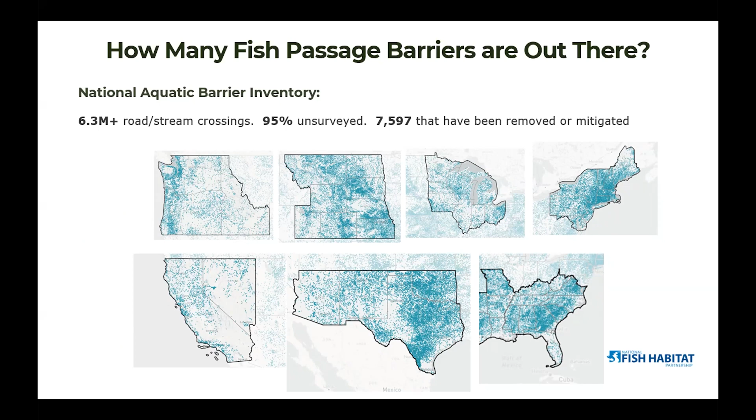So this is a pretty savvy group. Don't have to tell you guys what the problems are with these culverts, but just in general, high water velocity, shallow depth, steep gradient, and plunge height and distance. So my background's primarily salmonids, but as I've got out in the world, I've learned this term AOP, Aquatic Organism Passage. So hellbenders in the southeast, darters, eels. I learned about the bog turtle recently, our smallest turtle in North America.

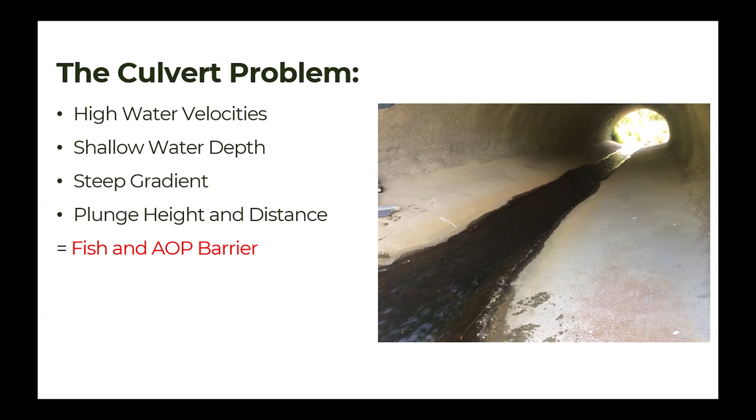So removal and replacement is the best option. I mean, I would never argue against that. There's a project, Interstate 5 is a main north-south in Western Washington. There's a 3 culvert replacement project under Interstate 5. It's going to cost $136 million for one fish passage project. And people are kind of shaking their head that that's a lot of money for these projects. Are there other things we can do? Those are to be done, it's part of a settlement, but it's just such a massive problem. All of our aquatic creatures are suffering from 1,000 cuts.

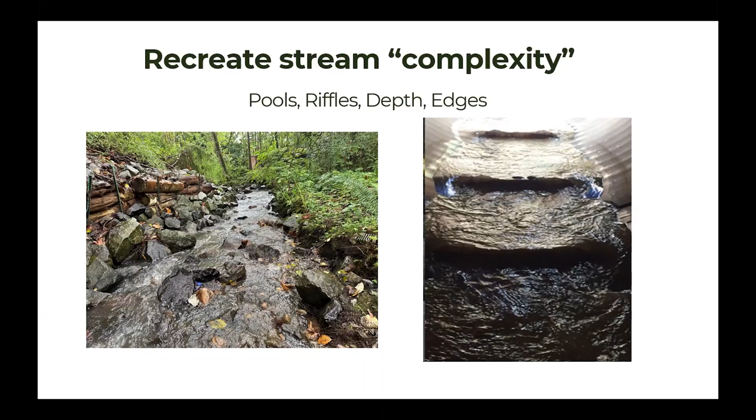So baffles and weirs, I've studied fish passage for 30 years. This is the things we've done: CFD analysis, physical models, on-site, 1-to-1 scale fish ladder evaluations. So this is not strange to me. So I ChatGPT'd it, some of the first weirs were used for fish passage back in the 1830s in Scotland. So there's tons of information on using weirs and baffles for fish passage. I could go into the science later, but let's assume for the moment they're useful at times. Well, they definitely fell out of favor in culverts because, as you can see here, they reduce the size of your culvert or conveyance.

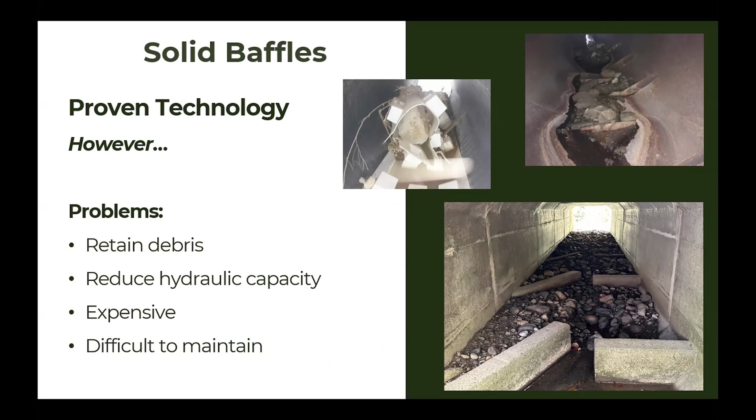They catch a lot of debris. They cause a lot of problems. They break. It's a maintenance issue. So in the conveyance culvert world, pipe world, they kind of fell out of favor. But we came up with this idea: what if you could address some of those problems with solid baffles? And that's where you get into these flexible baffles.

So similar biological benefits to those solid baffles, but they're designed to not retain debris. They maintain most of the hydraulic capacity of your culvert. And we can talk about what they're made of and all that stuff. They can be a temporary or permanent installation.

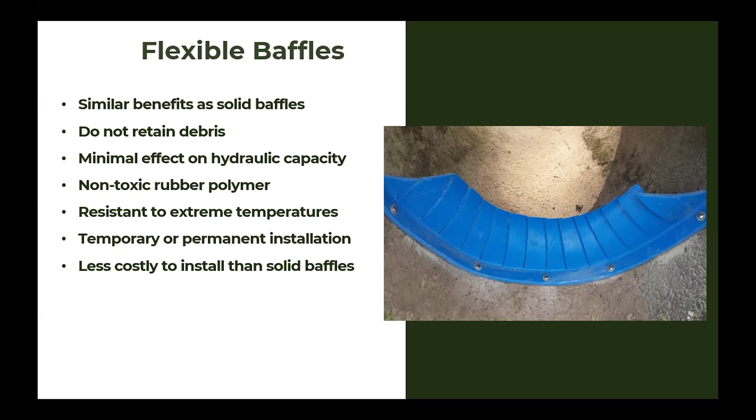In New Zealand, they're managing their culverts like we do our bridge systems in the United States, where you have regular assessments. And they look at both the physical condition of the culvert plus the fishery. So you get an annual or biannual report on the condition of that culvert for the roading authorities, the DOTs.

So these can be installed in any size or shape of culvert. We started this about 5 years ago, working with these flexible baffles, and it's kind of a one-off project. I work with a biologist or engineer. We get the size and shape of the culvert. We develop some spacing tables based on slope. And then the baffle is sized to what organisms you're working with.

I'm more in the Northwest, kind of northern here up into Canada. So we're trying to knock down high flows for stronger swimming salmonids. But in New Zealand, and I'm learning more about this in the southeast US, they're dealing with much smaller, weaker swimming fish. In New Zealand, they have freshwater shrimp, eels, galaxias and a small minnow. So they use smaller baffles to pool water during summertime low flows. So it's a real flexible type installation for a flexible baffle, so to speak.

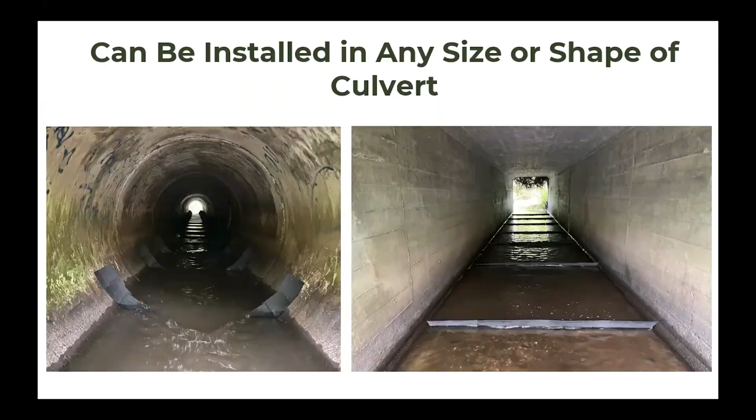So costs, and there's a lot of success stories. They did a project with some high school kids up in Surrey, BC, a 500-foot long concrete culvert. It took 3 days for these students to put in 60 baffles. And that fall, we had coho salmon pass up for the first time in 70 years. And I have a picture on my display out there of a little 4-inch coho smolt juvenile. It's the first salmon produced up there in 70 years. It's the best project I've ever worked on in my career.

So we can talk about success stories when I do the longer presentations. But let's dive right into cost. King County, which is the Seattle area, has a whole list of culverts they've identified. They applied some costs with removing and bridging, which is a great type of project. But I thought, well, heck, what would it take to install baffles in some of these where it's most appropriate? You need a narrow focus on what's most appropriate, like a depth barrier, a slope barrier, or a velocity barrier. Those would be appropriate for a baffle installation.

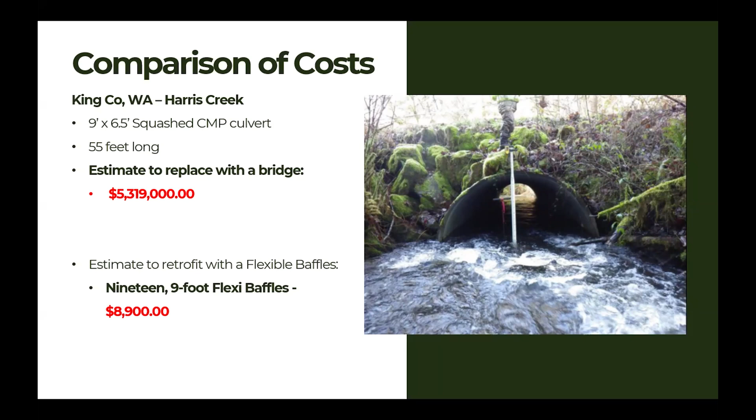Now, when you use baffles, they're not going to last as long as concrete. You do need a follow-up maintenance program, and New Zealand's way far ahead of us on that. They're doing annual inspections on their culvert projects. So if there is a problem with one of the baffles or you need an improvement, you could do that each year. And another project, just mind-blowing, 1.8 million to replace these two. They're perfectly good structurally. They do what they are intended to do.

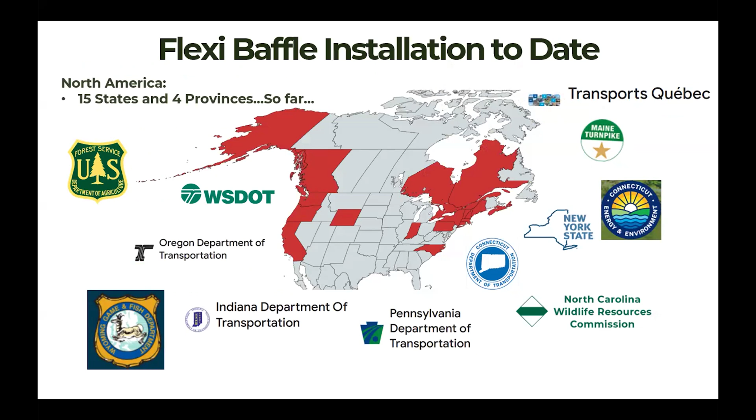So these are folks we work with across North America, 15 states, 4 provinces so far. We also have a bunch of projects in Western Europe, and Kelly's down in New Zealand, so New Zealand and Australia. So that's just a summary, straightforward stuff.